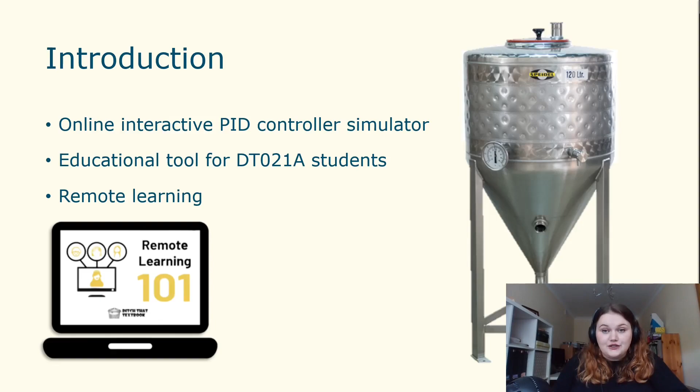This project has been applied to temperature control, where the user investigates PID control in relation to managing the temperature of the liquid in this tank, in response to changes in the desired value and in terms of the disturbances.

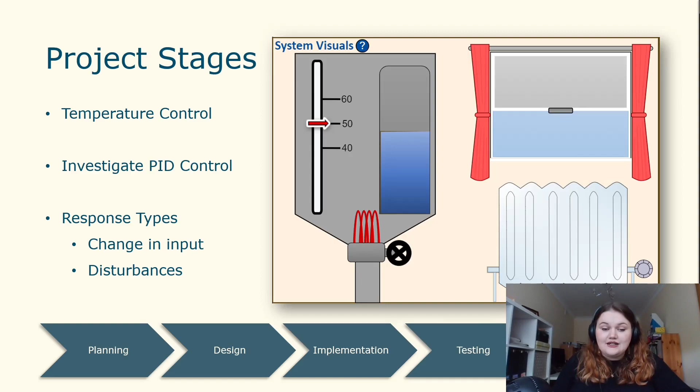This project had 5 main phases: planning, design, implementation, testing, and completion. These will be discussed in detail further in the presentation, but first we're going to dive into a quick demonstration of the PID controller simulator.

Upon loading the webpage, you can see the 4 main sections of the screen: system visuals in the top left, system plot in the top right, block diagram in the bottom left, and user entry in the bottom right. Each of these sections has its name indicated in the top corner, alongside a help button indicated by a question mark, which offers additional information for that section.

There are some quick introductory instructions outlining the PID controller simulator at the top of the screen, indicating that further help is available in each of the help buttons.

This PID controller simulator allows the user to enter values for control parameters such as the proportional gain Kp, integral gain Ki, and derivative gain Kd. These values can be adjusted in the user entry section using the sliders, as demonstrated here.

These values can also be set by manually entering a value, by clicking on the white box displaying the value, which prompts the user to enter a new value. This then updates the slider position to reflect the new value.

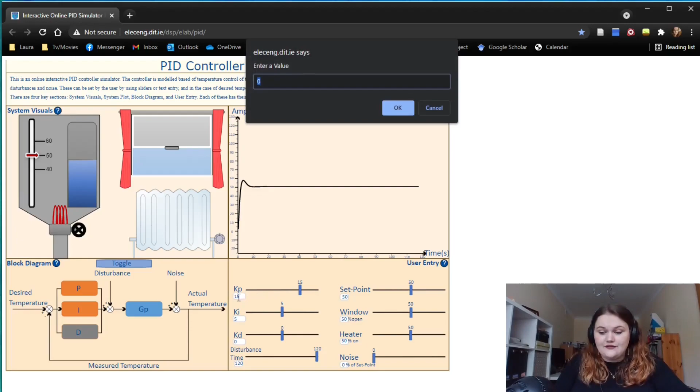In the case where the user attempts to enter a value beyond that control parameter's range, such as setting Kp to 30, a warning message comes up and indicates the correct value for that control parameter.

You may notice that as sliders move, if the control parameter is 0, such as setting Kp to 0 here, the P block in the block diagram section is greyed out to indicate to the user that this control parameter is not affecting the output of the system. This may help highlight the distinction between P, PI, and PID controllers, and so on.

The block diagram section also includes a toggle button, which displays the Laplace representation of the individual blocks' transfer functions.

As part of a PID controller simulator, setting the set point is important, and this can be done again through the slider or manually entering a value. This can also be done by dragging the red arrow on the tank to the new desired value, which is also reflected on the slider.

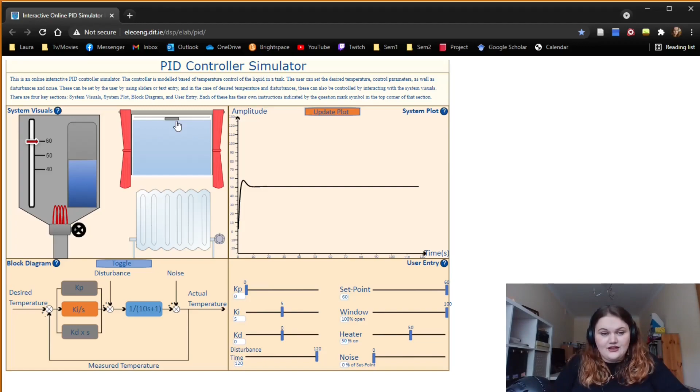Two other key sliders are the window and heater slider. These can be changed by interaction with the window and heater in the system visual section, and are used to represent disturbances to the system. The concept being: the more open the window, the colder the air in the room, which acts as a negative disturbance on the system. The heater is used to represent a positive disturbance.

As the heater gets closer to being fully, or 100%, turned on, it is at its strongest effect in terms of disturbance on the system.

The disturbance time slider is used to set the time at which the disturbance occurs, which can range from 0 to 120 seconds. The end of the simulation time, meaning the disturbance has no effect on the system output within the time frame of this simulator, is set at 120 seconds.

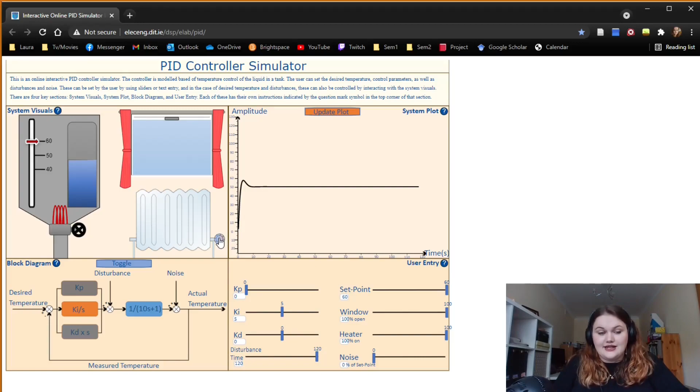To demonstrate, with these control parameters, I can hit the Update Plot button, which has turned orange to indicate that the control parameters have been changed since the last time the plot was plotted, and a new plot can be generated.

This graphs the system output in response to a change in input after a short loading period. Now I'll change the disturbance time so the effect of the disturbances on the system can be seen in the plot, and update again.

This shows the response to a change in input and the disturbance response. Finally, the last slider is noise.

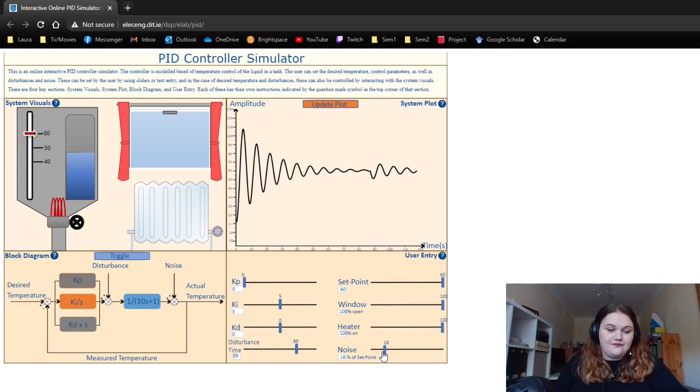This can be adjusted to have a magnitude between 0% and 100% of the value of the set point. Having adjusted it here, the Update Plot button has again turned orange, so I'll update the plot. And now I have a noisy output.

It also involved research into the system that the PID controller would be applied to, whether it be temperature, level, speed, etc. I also had to develop my own skills using graphics editing software such as Inkscape, and apply previous coding skills to languages new to me personally, JavaScript and HTML.

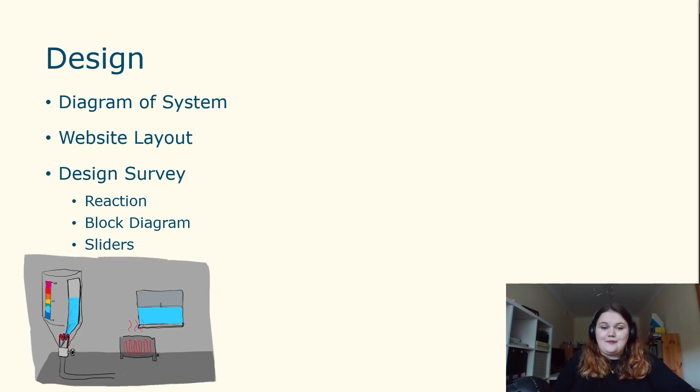Also, designing the layout of the website, as shown here, which was carefully chosen to have high colour contrast using dark blue text on a warm tone background, to be more accessible to those with dyslexia and reduce eye strain.

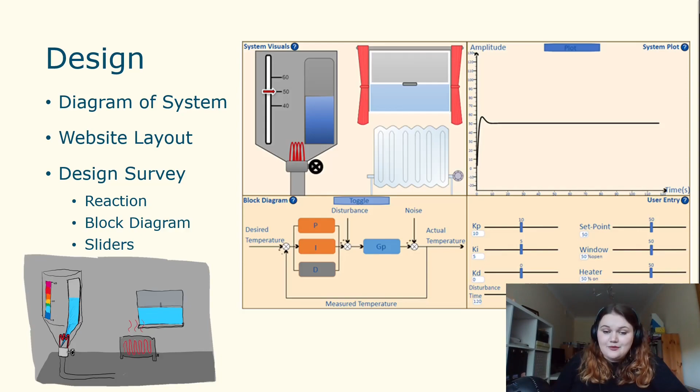Also, a survey was carried out of DTO2A students and control lecturers, asking for their feedback and input on design decisions in this project.

Based on the participants' responses, the initial response to the design was quite positive, and the most common descriptors for the user interface was that it was simple, clear, and understandable.

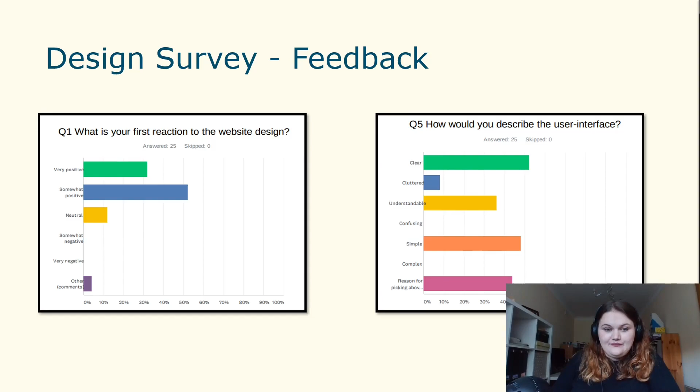As part of the input into design decisions, participants were asked to give their preference for block diagram options and slider options. There was a clear majority in the block diagram option for having the breakdown of the controller into P, I, and D blocks. In terms of slider options, there wasn't a clear preference, but since there was a slight majority for horizontal sliders, and uniform design and consistency is more intuitive and accessible, the final design includes the horizontal sliders.

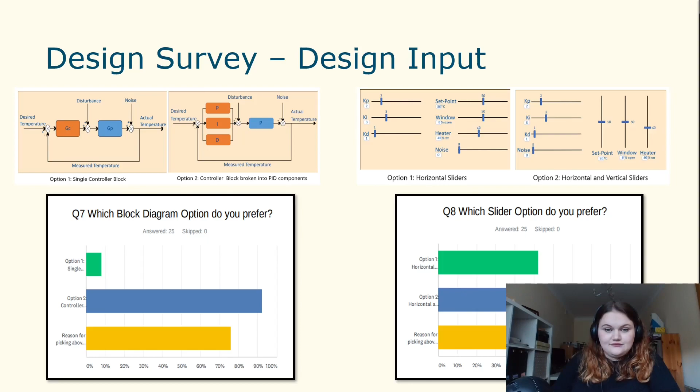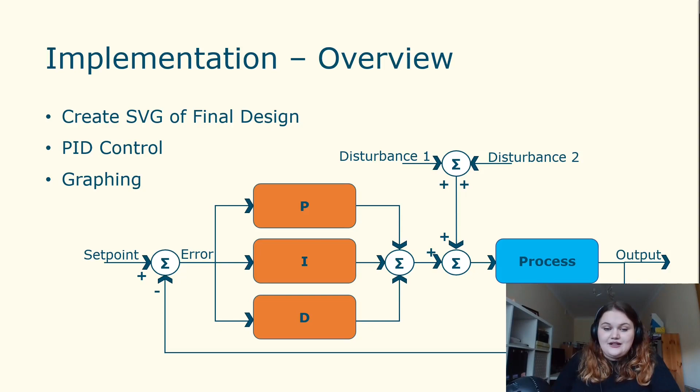The implementation stage involved creating the final scalable vector graphic, or SVG image, coding the functionality of a PID controller in JavaScript without any inbuilt functions, and graphing that output. It also involved developing the interactive features of the simulator shown in the demonstration.

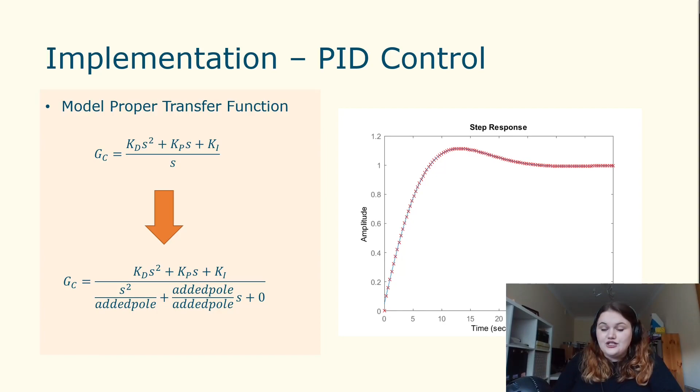So implementing the bilinear transform meant that the transfer function could be represented as a difference equation, which can be implemented in JavaScript. The step response here shows the output of the bilinear transform using the built-in MATLAB functions in blue, and using the difference equation in red.

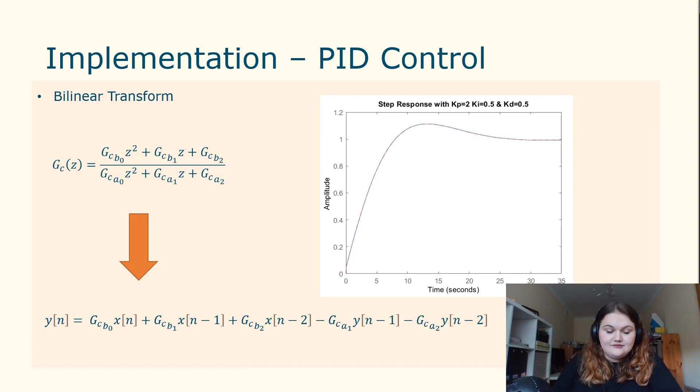The implementation of the graphing involved two methods, one of which you saw in the demonstration, involving plotting over a fixed period of time and using the disturbance time to input when disturbances begin to affect the system. An alternative method that was investigated was plotting the system in real time using an open source JavaScript library called Plotly. I have a quick video here explaining how this would work using random data.

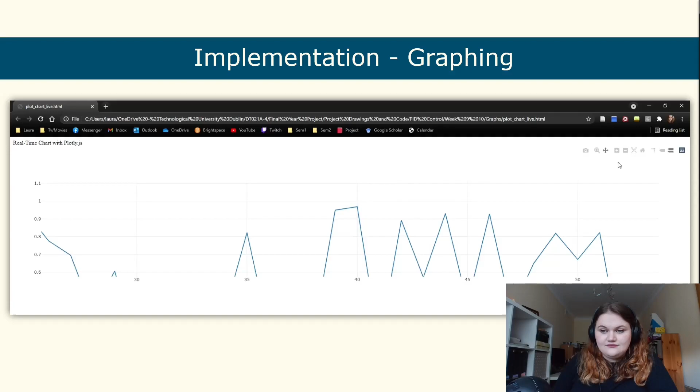Moving on to testing, MATLAB is used at many stages for testing, such as determining the range of the control parameters KP, KI, and KD using the PID tuner application in MATLAB. The effects of disturbances on the system were also investigated to give an indication of a suitable magnitude of disturbances that will have a visible impact on the output of the plot. MATLAB was also used to test the limitations of the graph axis for the plot of the output, getting the minimum and maximum amplitudes, as well as the time frame of the plot by investigating the responses at the extremes of each of the control parameters in all possible combinations.

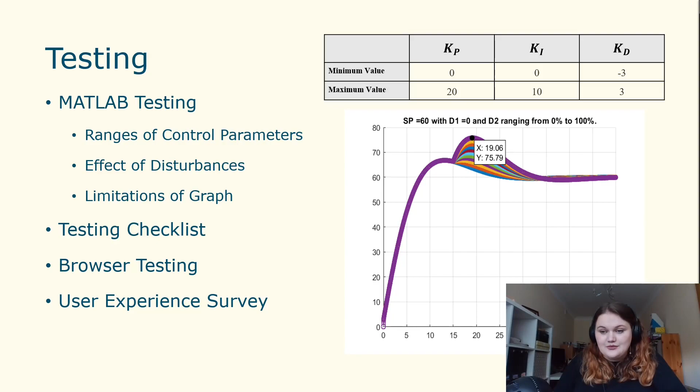Testing was also carried out on various browsers, although Chrome was the dominant browser used during the development of the project, as it's the most popular browser in terms of market share, which was also reflected in the browsers used by participants in the survey. Chrome and Edge performed well, with one known issue where if the slider is dragged too quickly, it can highlight all text on screen.

Firefox also performed well overall with only a few minor issues. Safari did not perform as well, with the sliders not working as expected.

In terms of feedback of the user experience survey, most reactions to the online simulator were positive, and said that the online PID simulator was intuitive to use.

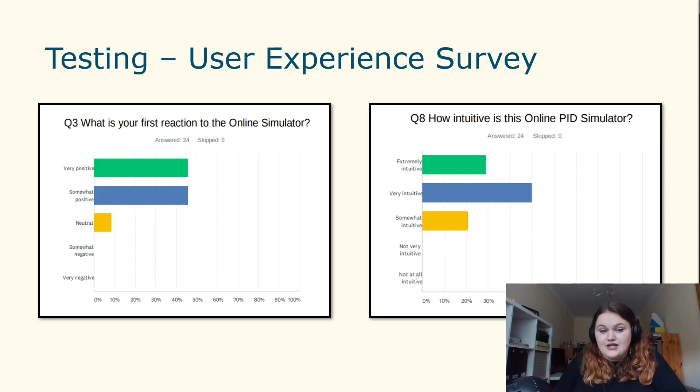Participants were also asked how useful this PID controller simulator would be as a learning tool for control, with the majority of responses indicating that it would at least be somewhat useful and up to extremely useful. When looking at the subset of participants who indicated that control was very relevant to their area of education, all members of that subset responded between somewhat useful and extremely useful, with a clear majority responding very useful.

In conclusion, the main objective of developing an online interactive PID controller simulator was achieved. It has been evaluated by students and staff of DT021A with a largely positive response, and has been deemed to be useful as a learning tool for control.

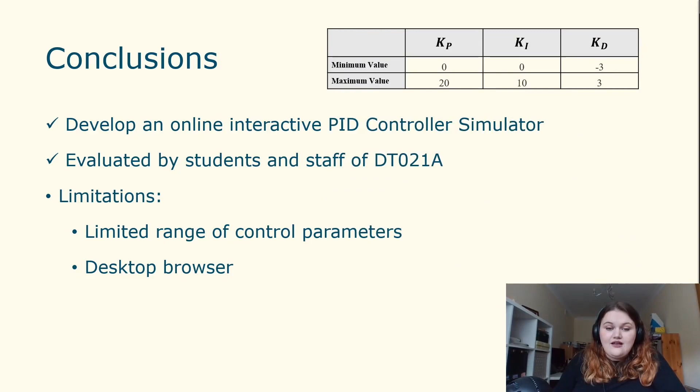However, there are also limitations of the project that must be discussed, such as the limited range of values for control parameters, like KP can only be a value between 0 and 20. Also, the fact that this project is only designed to work on desktop browsers and not designed to work on mobile platforms. It also has variations in performance in the different browsing platforms tested.

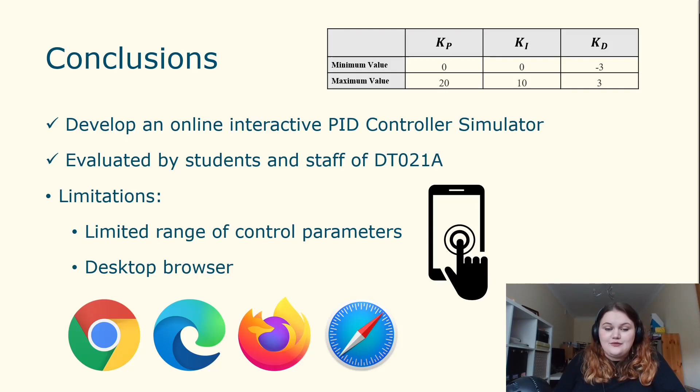Hence, in future work, I would like to address some of these limitations and make improvements to the current PID controller simulator. One improvement could be improving the system plot, having it update automatically, or preferably plot in real time as previously discussed. Furthermore, a frequency domain plot would also be a useful addition, and the option to toggle between a time domain plot and frequency domain could be made available.

Also, the addition of an interactive visual element of a clock that can adjust the disturbance time would be a nice touch, to relate disturbance time to a visual element, which was a piece of feedback from the user experience survey. Touchscreen support could also be added, which would allow mobile devices to use this online simulator also.

I would also like to improve browser support by investigating known issues and resolving them where possible, such as the highlight text issue on Chrome and Edge, and improving Safari's overall performance. I would also hope to add keyboard control, so that mouse inputs are not the only method of entry, which would make the simulation more accessible.